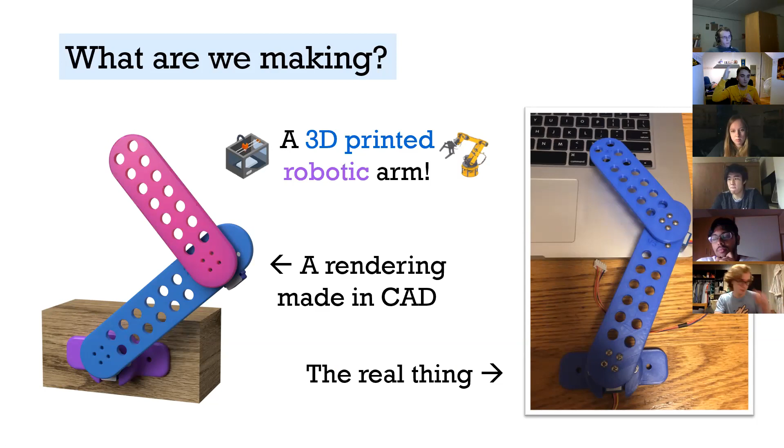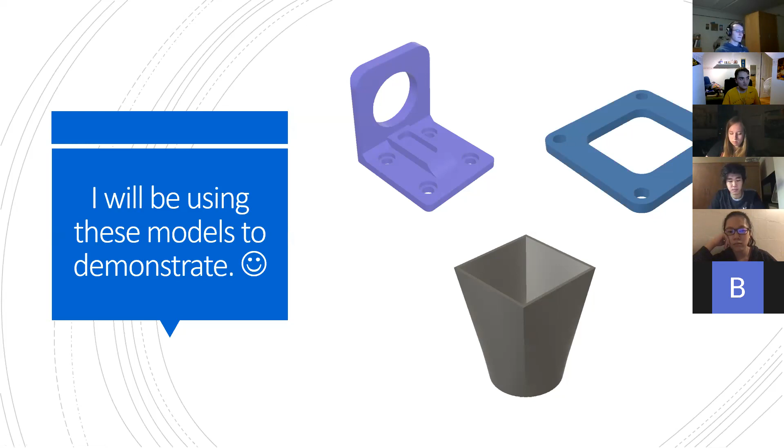Maybe, we'll see. Okay, so today what we're talking about is everything you want to learn about CAD. As someone who's been using CAD for maybe the last 5 years, I'll go into more software side later, but I primarily have used Inventor and Fusion. I've taken multiple classes dealing with CAD, and there's a lot to be learned, especially if you've never done any of this stuff before or never heard of CAD - I will go through it.

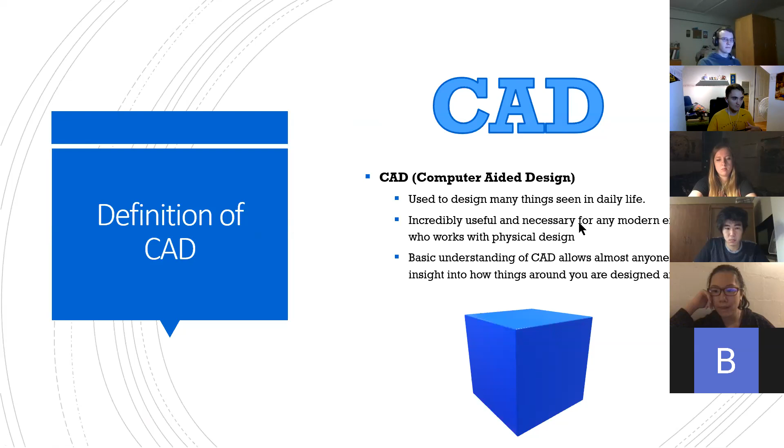So you might be asking, what is CAD? Well, CAD is computer-aided design, and as stated here, it's used by any modern engineer - mostly mechanical or industrial engineers - to design whatever you can find in the real world. Most everything you find around you is designed in some way, so it's incredibly useful to have these skills and know how things are designed, so you can understand better how engineering works and how things come together in projects.

Before CAD, CAD only existed once we had computers, based on the computer-aided design aspect of things. Before that, we had drafting. Drafting is basically where, since you only have a 2D piece of paper, you draw out different faces of the part or object to represent it in 3D. What that means is you look at things from certain directions and draw a picture of them in only that direction.

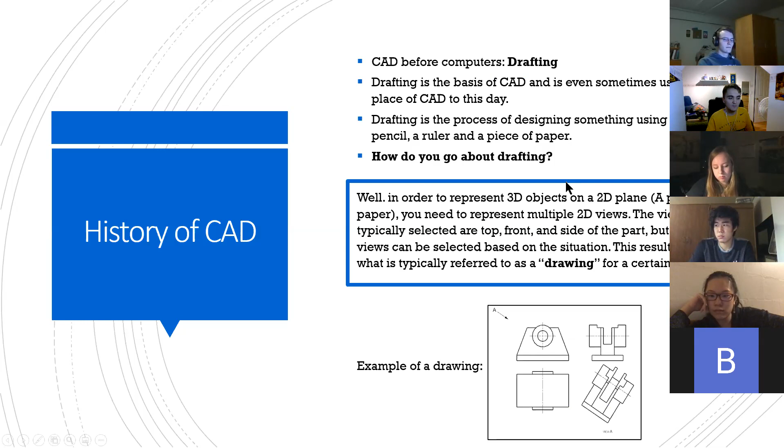So if you were to look at this cup - I don't know if you'll be able to see this - the cup would have a front face, a top face, a rotated right face. For most objects, you can represent them in drawings from different angles to understand how they take up 3D space, because before we couldn't represent things in 3D space without making them. CAD is awesome because we can do that very easily. Some people still use drafting - I've done it in classes - but CAD has more taken over.

So drafting is what you'd call a drawing. A drawing is very central to mechanical engineering or anything like that in general. If you want to make a part, you'll need dimensions and values for sizes and measurements. So if you have some object, you can know its height, width, and length, and draw that out onto the page. Then if you want to manufacture it, it's very easy because you have those dimensions - for any type of manufacturing, you need precise dimensions, and being able to see those on paper is very useful.

The next point this talks about is machining. Machining is a general term for basically any type of manufacturing you can think of. One example is CNC, computer numerical control - if you've seen machines with a spinning tip that moves around on an axis and cuts things out. There's also a lathe, where something spins and you cut at it, and many others. But basically, if you ever want to machine something, you need to give the machinist a drawing first, because they need dimensions and all that stuff.

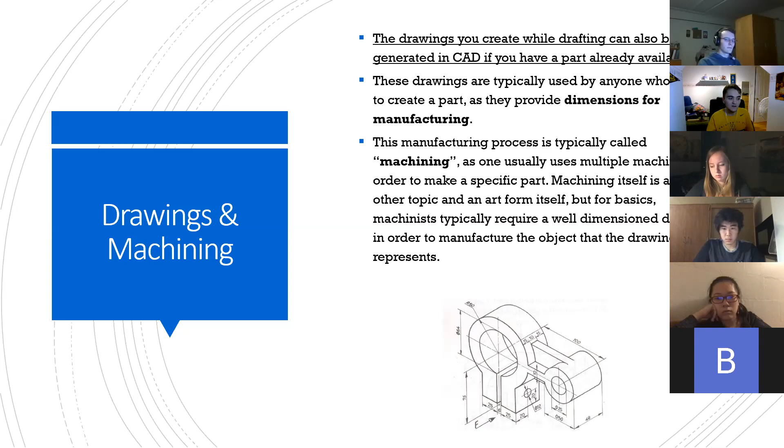Okay, so this is a very important question with CAD. And basically what it comes down to is, can you make this? There's certainly lots of people who will go into CAD and, if you don't have the experience, you wouldn't know, but you're like, oh, I make this really cool thing, but there are restrictions in the real world if you can actually make it or not.

Machines can only do so much, and I think it's good to have knowledge of that. So if you're ever going to be like, oh, I can make this thing, you might be able to make it, but typically there's optimizations you can make while in CAD to make sure that you can make it or not.

So for instance, for this plate, most likely what you do is you start off with a big sheet of metal. You put it on a CNC, which cuts it out by spinning a drill bit really fast and cutting the shape around it. Then you cut out the inside, and then it will mark out the holes, which you'll go to a drill press and drill out.

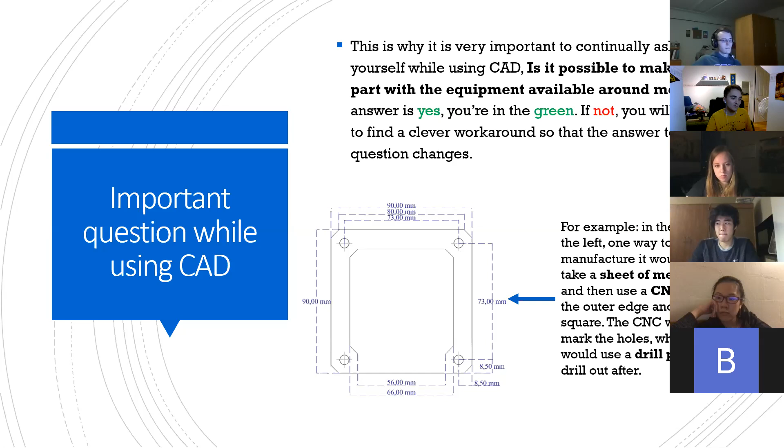Basically what that means is for any part you're ever going to make, you want to have that kind of path in your mind of the steps you'll need to take to actually make it. Start with a sheet of metal, then use CNC, then use a drill press, then clean it up a little bit, do things like scrape it to make sure the edges aren't sharp. There's already a pathway in my mind of how to make that part. So that's always a good question to ask whenever you're designing anything.

Okay, so I'm going to go through a little bit of the uses of CAD. There's honestly a lot, especially professional product design. Most modern mechanical or industrial engineers are using CAD in some way or form. It's an integral part of modern engineering. But it is for a reason, because there's lots of things you can achieve when you have this kind of 3D space where you can do whatever you want.

On the other side of CAD, there's also a lot of recreational use. People will just go out and design random things, just have fun and make things that solve problems in their lives. Personally, I've done that a lot. For a little background, I did a lot of robotics in high school, and I'm still doing a lot of robotics now. I use CAD all the time in robotics.

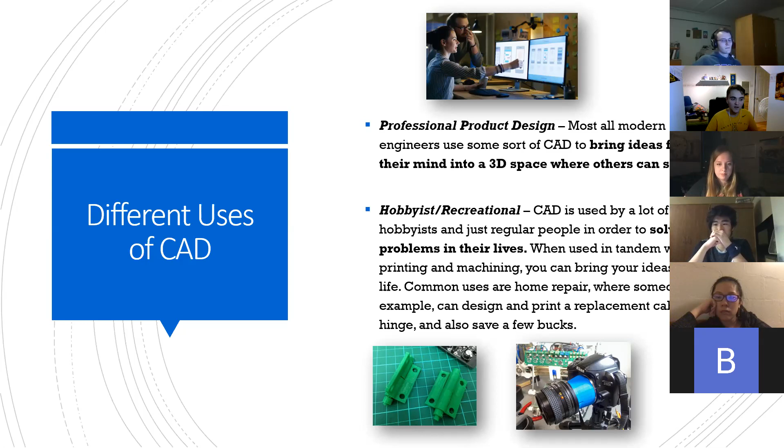But also, when I got home, I had the idea of like, oh, I could design something cool to fix a door hinge, or fix whatever, or just make a phone holder. I think a lot of the experience you can gain comes from just messing around in CAD and coming up with whatever ideas you can come up with. I think that's how I learned a lot as well.

And I'll go into more with the different programs you could use. As I said earlier, there are many different CAD programs you can use. I started off with Inventor. I did Inventor for like 3 years, and then I did Fusion for about 1.5 years. Both are great programs, and both are free.

So if you want to go out right after this meeting and download these two, I would recommend it. Personally, now, at this point in time, I more recommend Fusion. It's great for beginners, so if you have no experience with this kind of stuff, Fusion's great, and there's thousands of tutorials online. Next meeting, we want you to download Fusion, and Fran is going to teach you basically what we are going to do there. So if you're interested, definitely download it before next meeting.

But if you want to get it even sooner than that, it'd be great to just mess around and have some fun and learn something. There's so much to be learned, and I honestly do think it will help you in the future.

There's other programs as well, stuff like Creo, Pro Engineer, and AutoCAD. Those are all great ones. They're more industrial, as I said, so they're used mostly in industry. I have experience with Creo because we actually took it as a class, ME 110, if any of you are ME majors. It's cool, I like it. I personally like Fusion better, but all of these are great programs.

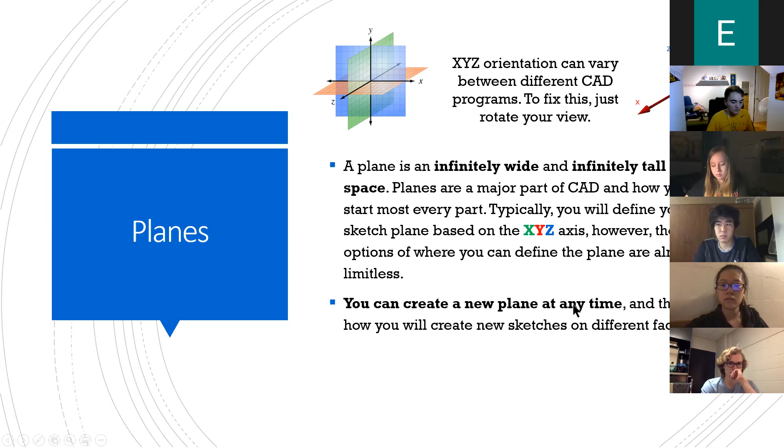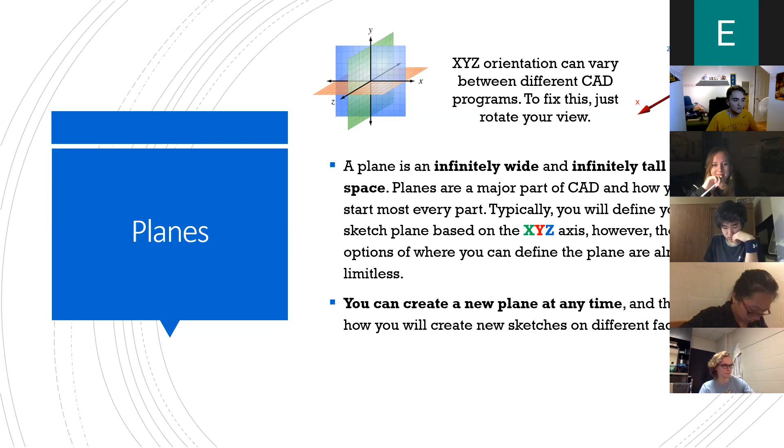Once you get into more advanced or intermediate topics, what you'll need to do is create new planes to do different features. I'll go into more why you would ever want to do that, but just know that you can make tangent planes, which is, if you have some curve, make it tangent, then it will be touching it just at one point, that's just what tangent means. I'll show more examples later so it makes more sense.

Okay, so CAD is based in sketches. So what I was kind of talking about, the drawings thing where you're taking a 3D object and making it 2D, or starting with 2D and then going to 3D, you will need sketches. Sketches are great because, like on the bottom, you'll see the car, this is just like you can make a sketch of something that shows what it will look like in 3D.

But a sketch will typically start off where you'll select a plane, usually like the XYZ plane, and you'll draw some shape. So that could be a triangle, a square, it could be some complex shape. But that's how you start basically every, most every 3D object.

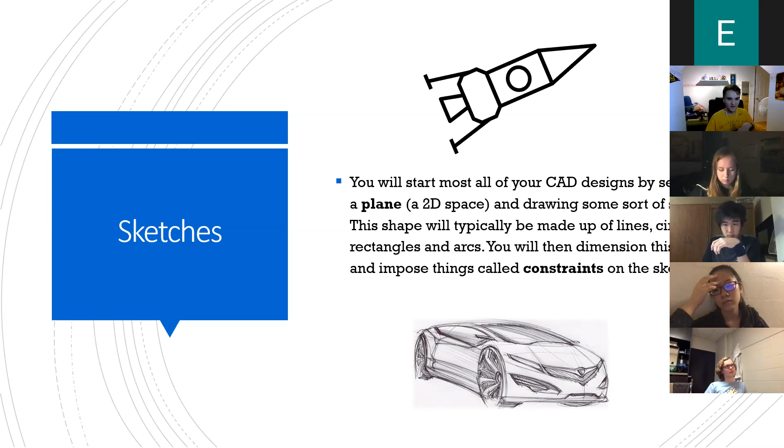So I have this slide. I still love these emojis. Basically, what I'm going to talk about next is something called constraints.

Because when you start working with these sketches, typically you'll have a lot of lines. Let's say you have some weird, complex sketch.

You'll need to know about constraints to help you better draw and constrain these sketches. For this example, on the left you see the circle is right in the middle. The only reason it's in the middle is because I said the box is 80 millimeters wide, and I want the circle at 40 millimeters, which is half, so it's in the middle.

But if I go back and decide my block is a little too wide and make it 70, the position of the hole will still be 40 to the right. So it will be off center.

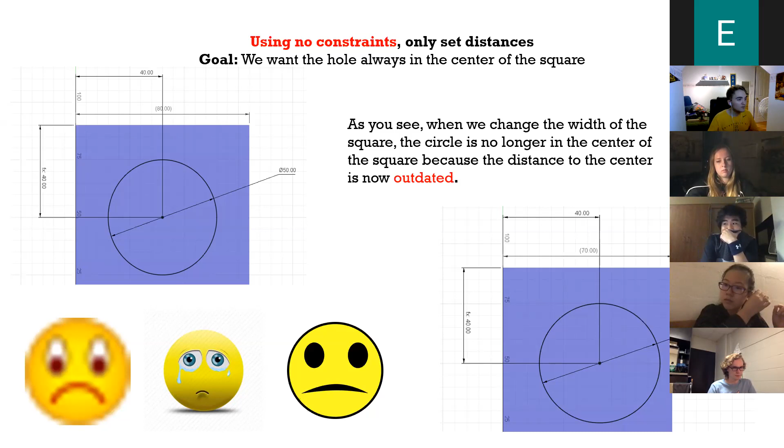It's one of those things where I can go back in and change it to 35 if I want, but it's not efficient, because if I then want it to be 90, I have to go back every single time and make more changes. So there's something really useful called constraints.

Constraints are geometric constraints, basically creating a relationship between different dimensions. Some popular ones are: perpendicular, coincident, parallel, fixed, horizontal, vertical, tangential, and equal.

These constraints allow you to create complex geometries that adapt to changes. So if I want the hole to stay in the middle all the time, I can do that using constraints, and that's what's great about it.

If I go back and decide that rectangle or box I was making was too wide, I can make it smaller or even wider, and what's going on is that I set constraints.

For this example, I had that rectangle, I put the circle there, I put a line on each side of the circle, then a line on the top and bottom of the circle, and I put lines on the edges of the box.

Then, as you see at the bottom, I set lines 1 and 2 equal to each other, and lines 3 and 4 equal to each other. So no matter how wide or tall I make the box, I'll never have to go back and change where I want that hole to be, because it will always update to how wide the box is.

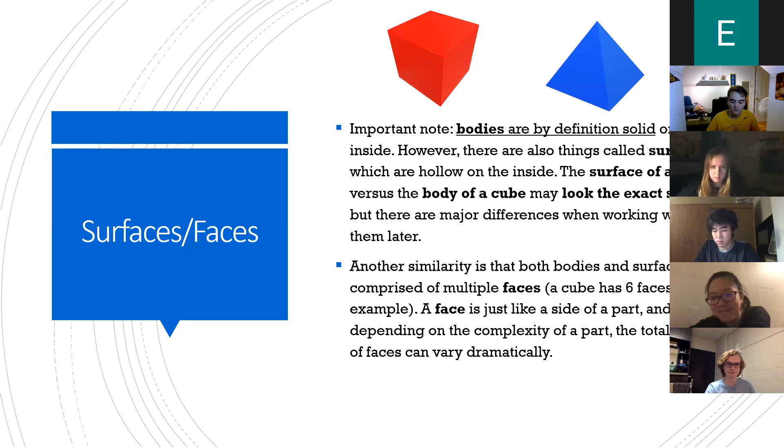Any more questions, Bennett? All good, thank you. Hope that cleared it up.

Okay, so next topic is 3D modeling. So we've got this shape, this 3D body, this cube, and now we're thinking, maybe I want to do something a little more, make it look nicer, make it perform better, whatever.

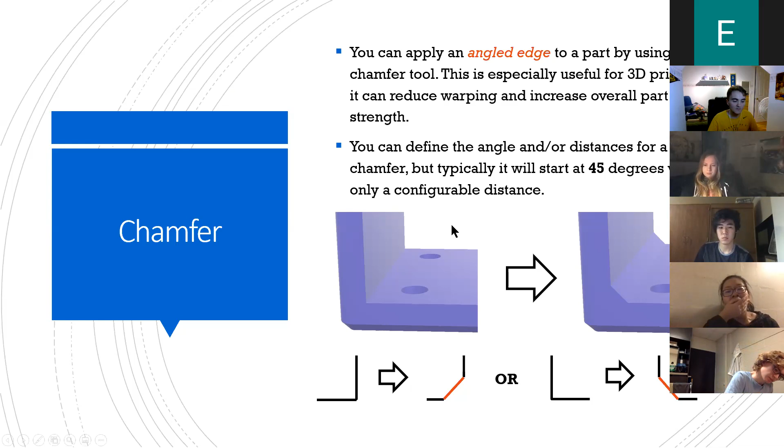It allows the part to adhere to the bed better, and it makes the edges smooth so you don't cut yourself or anything like that. Not cut yourself, but just, you know, it wouldn't be too sharp.

Okay, so next thing is the fillet. Fillet is also a very important tool, same thing as a chamfer. You're selecting an edge of a part. So if you took that cube, selected one of the edges, and pressed fillet, what you're doing is rounding it. You're putting a nice arc round to whatever is there.

But it also goes conversely with the bottom picture. What you'll see is that you can round things the other way. Basically, it's adding material versus removing material. Usually, from most stuff you do, you will be putting an edge on things where it removes material. You don't add material as much, just to go off experience. But you're just making a nice round of things.

Yeah, this is great for aesthetics. It looks better for sure. It is great for, what's the other thing?

Oh, so when I say reducing warping, I'll go into more detail the third one, but basically the short answer is when you 3D print something, as it's printing, because you're extruding hot plastic, it starts to want to cool because the air around you is much colder than what it's printing, and so the piece you're making will want to cool. So to stop it from cooling and then coming off of the bed, you typically want to put a rounded corner on all of your part, like make all of the bottom corners of your parts rounded so that it does that less.

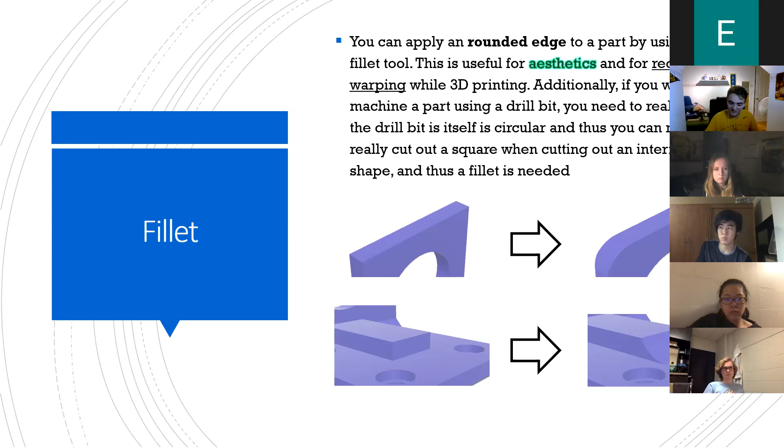I'll go into more detail with that, but it's very useful with this. This is another great use of fillet right here. And basically what this all comes down to is that you see on the right versus the left. On the left, there's very sharp 90-degree angles. But on the right, you have those nice rounded corners on the outside and the inside.

What that comes down to is the fact that the part on the left would be really hard to make in real life. It's close to impossible because of how we make things. In this instance, what you do to make this part is you would take a sheet of metal, get the design you want, and then put it on a CNC. What the CNC is going to do is use an end mill. An end mill is like a drill bit, but instead of being a regular drill bit, this one's actually flat, and it's meant to spin much faster. And what you're doing is spinning this drill bit so fast that you're cutting through the metal sheet.

So what we do in this scenario is you take that sheet, put it on the bed, get it all ready, and start it going using the shape of this part. You'll create something called G-code. I'll talk about that more later. But basically what that does is tell the CNC head where to go and cut things.

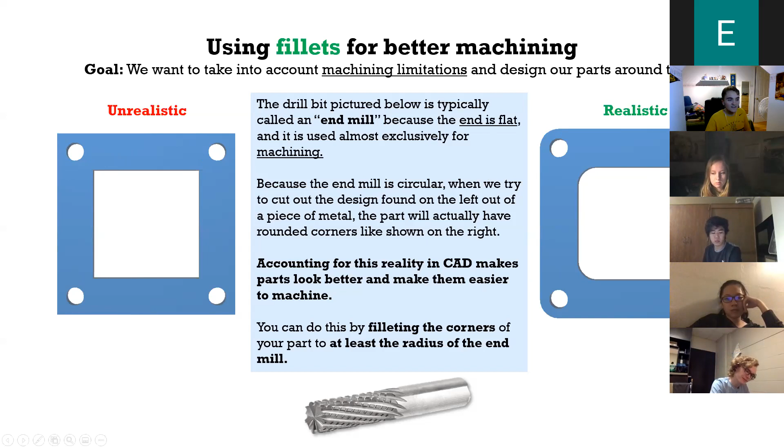Or what you could do is you go right, nice curve, and down - that's what fillets are great for. There are machining limitations you should know about when designing things, so you can make things that are realistic. I'd argue the thing on the right looks cooler than the one on the left, and the fact is this is actually realistic - this is something you could make.

Okay, that was a lot of stuff. Any questions? Okay, if that's the case, I will go on. I believe this will be my last section.

So you have your part, whatever you wanted to make. Let's say, for instance, that cube I was talking about, and now you want to put a hole into it. What you can do is the same thing: go through and select one of the faces, create a sketch, draw a circle, and then extrude that circle through the body of the cube, and the interior of that you'll have the hole.

That's one thing I didn't cover that I should have. When you extrude something, you can join or cut. So for the instance with the circle, if I were to extrude that circle, I'd be selecting cut instead, meaning I'm removing material. Based on what I was talking about before, that cube is a solid object, but when I do the extrusion cut, I'm removing all that material in the middle. I could go through and do all this, get some diameter, whatever spacing I want, and it works out good.

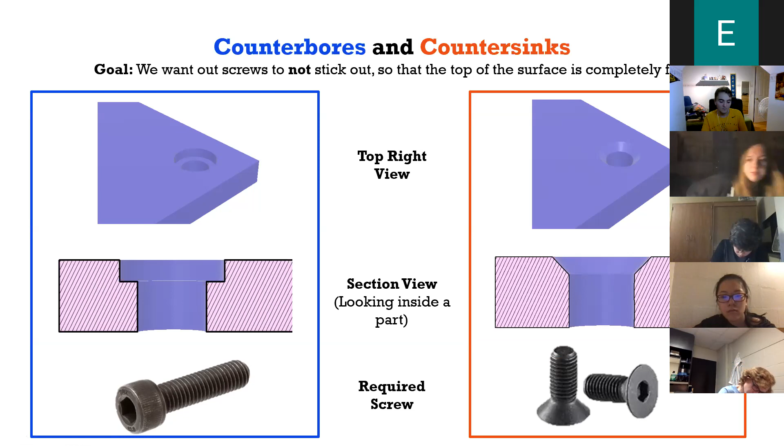This has nothing to do with holes, well, you can use it with holes, but it's something completely different. The pattern tool is very useful. Basically what it does is it allows you to copy one or more features and multiply it across one or more directions.

Let's say you make your hole with a nice countersink on it, ready for whatever screw fits nice and flat into there. But you realize your part actually needs like 20 more of these screw holes. Well, you could go through and make a point for each one of those holes, or even worse, make a circle for each one of those spots. You can do that and it'll work just fine, until you need to move something or do whatever.

Or you can do it with the hole tool, saying I want 3 more of these holes in this rectangular pattern. Typically for patterns you can define a rectangular pattern or a circular pattern. So if you have some cylinder and you want to put a hole on one side, you can rotate it around the central axis of that cylinder, making like 6 holes around it, all spaced by a certain number of angles.

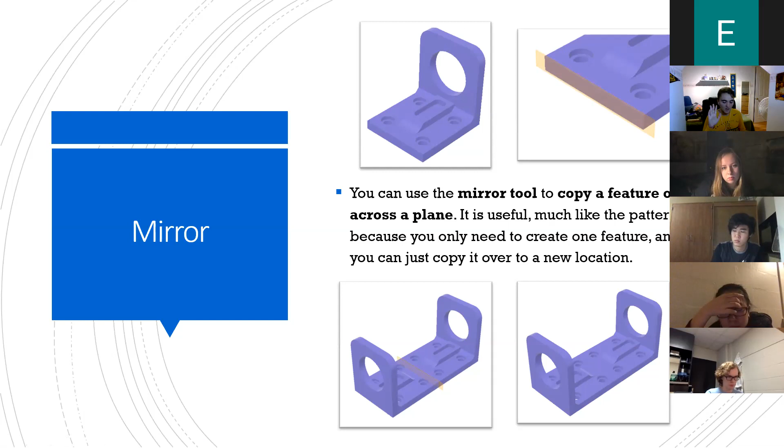You can also, if you want to put space between the two pieces when you reflect them, there's something called an offset plane. You select some face and say I want to go 3 inches away from it, and then you'll create a plane there that's parallel to that other face. So you create space between those 2 points.

Okay, now back to loft. So what a loft allows you to do is create a sketch at one place, and then create a sketch in another place, and then say, okay, I want the CAD software to connect those 2 sketches. And what you'll do with that is create a 3D body.

The reason I bring that up is, if you ever want to design something like a vase, one of the better ways is to have a couple different circles on all different offset planes. You can connect them all using the loft tool, and then edit how they bend in and curve. That's one of the bigger uses. I've used it for a lot of different things, especially for design and some of my more personal projects. It's a great tool.

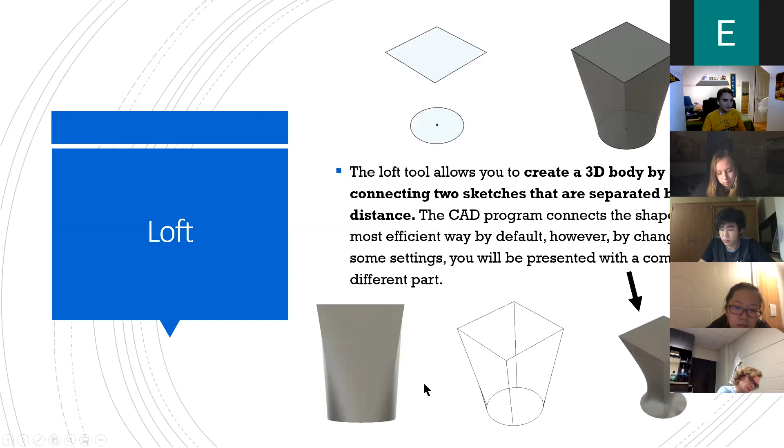You can make a lot of these things — that's the basis of what a cup is. You add a little handle on the side, but other than that, it's a great use case if you ever want to make something like a cup or a vase or anything like that.

But there are other, more important use cases with engineering — you save material and weight. Most of the time, even for 3D printing, the thing that is failing is not because the entire thing isn't completely full of plastic.

There's a concept in 3D printing, which I'll cover in the third workshop, called infill. You can choose how much of a 3D printed part you want to be full of plastic versus empty space. At a certain point, adding more plastic to the inside doesn't make the part necessarily stronger — it helps by a little degree, but how you design things is a bigger indication of how strong your part's going to be.

What's great about the shell tool, as you'll see if you get the chance to use it, is that you can save a lot on material without decreasing your strength, or only decreasing it by an insignificant amount. So it has a lot of functional use cases.

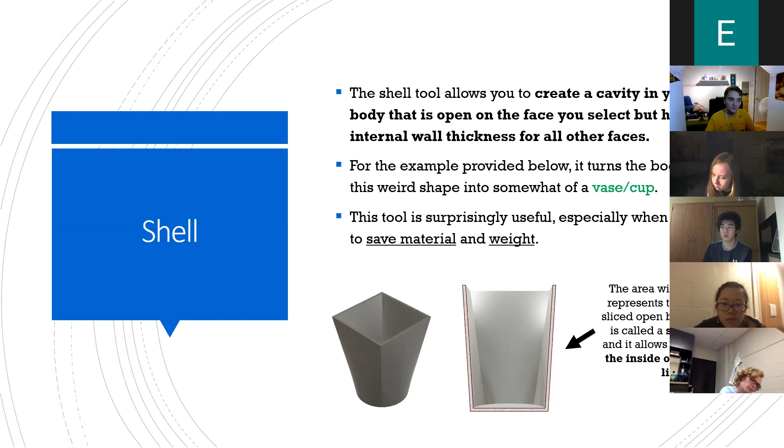I'll show a little bit more here, but this is some shell tool customization. I took this same shape — I haven't done anything to it, I'm using the exact same shape. You can do different customizations for shell.

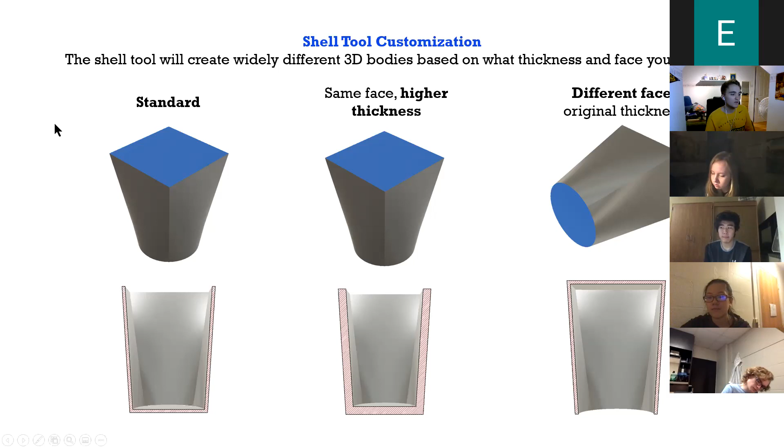This was a lesson, but mostly the section views are very useful. It allows you to see things you'd never see before, and the shell tools are useful. The section view is usually accessed through view. You'll select a face you want to look at, then select a distance from that face inside the part. The program will visually cut whatever is between that face and plane, so you can see the inside of a part and the other side. Any questions?

If that's the case, I believe this is the last slide. But yeah, I think this is basically it. There are many other things you'll find in CAD, and many other topics. I only covered a fraction of what could be done, but learning some of these basic things will let you access higher learning.

So if you go into CAD and just start messing around, try out using the shell tool, try the pattern tool. You'll realize over time these things will optimize your time, and you'll have a better understanding of how the world works around you.